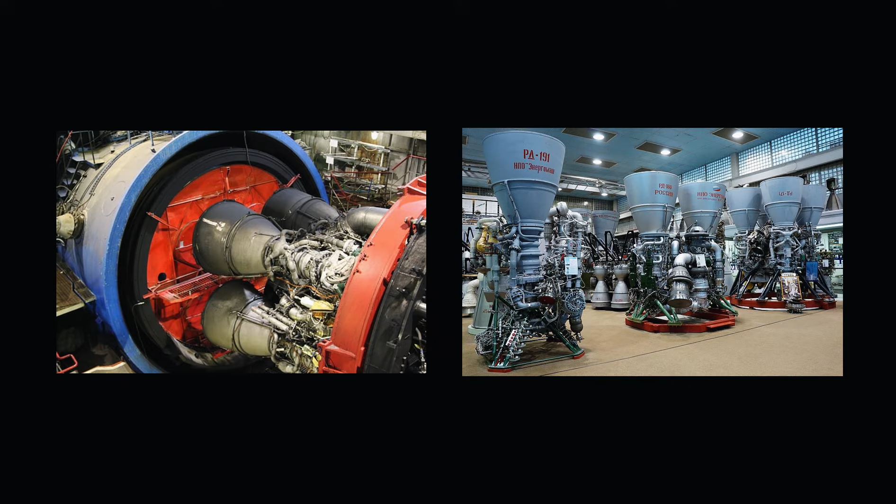The engines developed by this company ensure reliable injection into orbit of almost all the Russian space objects, starting from the first satellite Sputnik and the manned spacecraft to the Mir space station.

The story starts with the OKB, or specifically OKB number 456. OKB stands for Experimental Design Bureau.

During the Soviet era, OKBs were closed institutions working on the design and prototyping of advanced technologies, usually for military applications. From this OKB emerged the NPO Energomash, which launched a propellant-fueled chapter in Soviet and Russian rocketry.

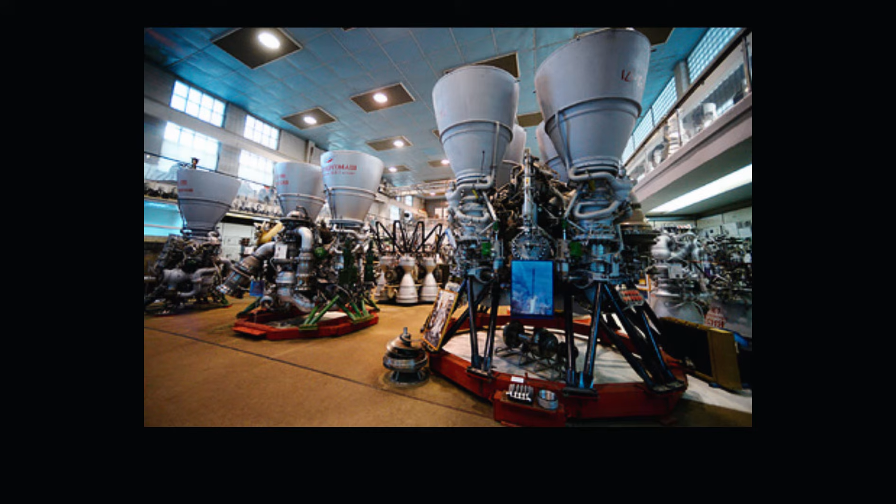Born from the rubble of World War II and propelled by the unyielding vision of Valentin Glushko, these institutions, being institutions of national importance, shaped the Cold War significantly.

OKB 456 marked the Soviet Union's audacious bid to conquer the heavens through the study and research of rocketry.

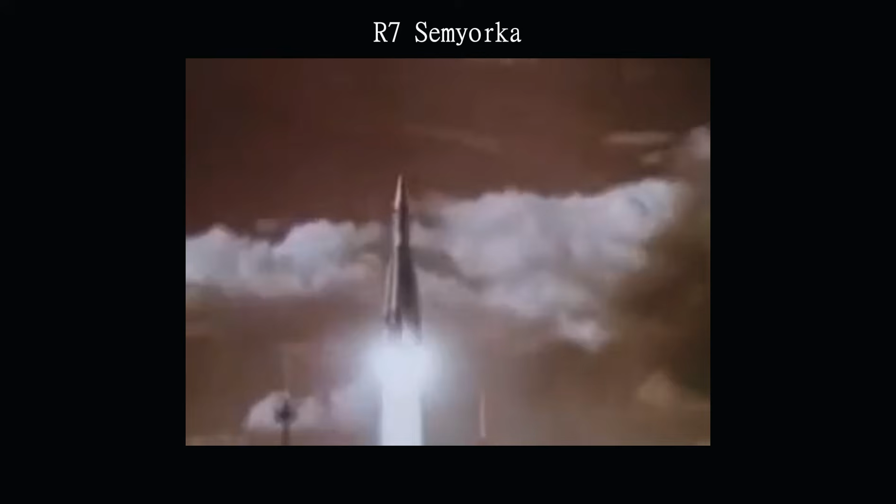As the Third Reich fell, the United States and the Soviet Union tried gathering as much information and resources as possible from the German aerospace ventures, especially the V-2 rocket.

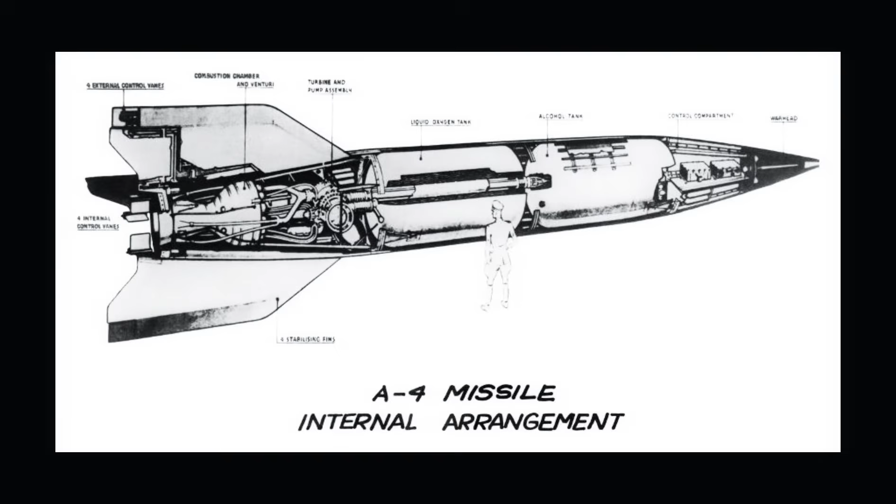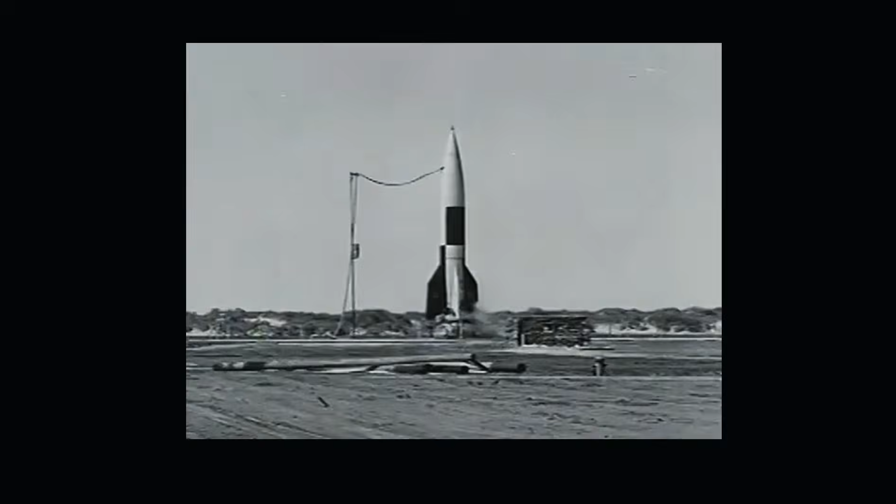Following this, Valentin Glushko assumed command in Khimki, a town in the outskirts of the Russian capital city of Moscow, where he was tasked with dissecting the V-2 rocket and studying the engineering and design that went into making this rocket one of the worst nightmares for the Allied forces.

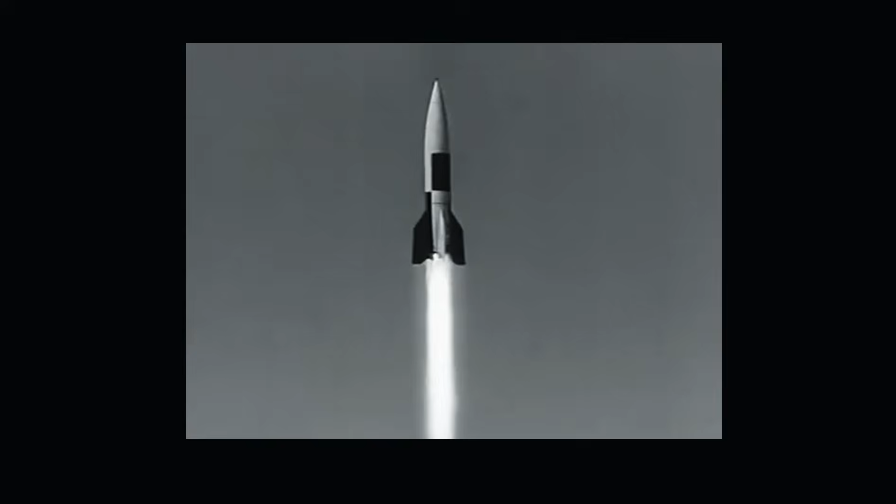By the year's end, the Bureau had transplanted its operations into an aviation foundry, erecting skeletal test rigs amid the chill of Moscow's outskirts. The RD-100 series emerged in 1947.

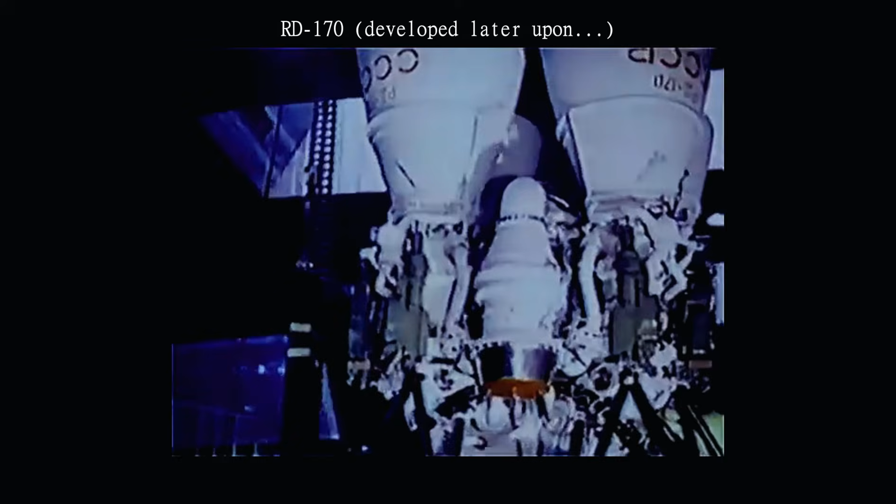These are engines running on kerosene and liquid oxygen, yielding thrusts up to 265 to 500 kilonewtons and specific impulses hovering at 200 to 251 seconds.

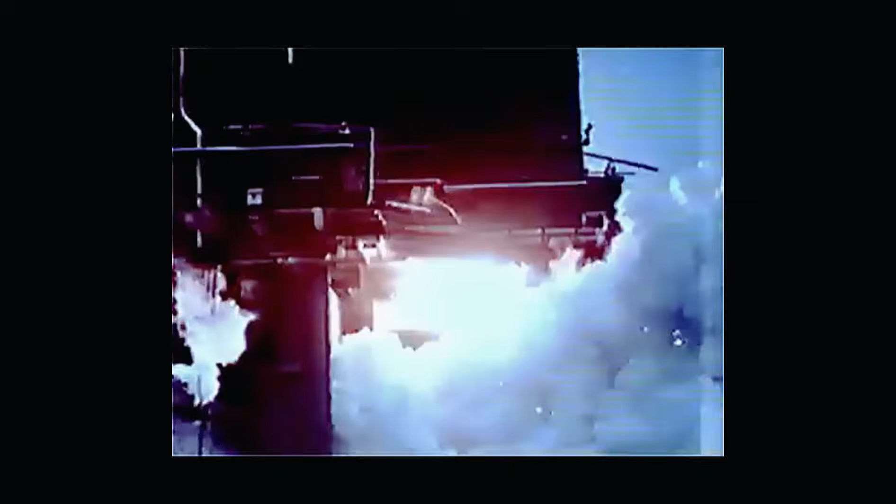This was the R-7 Semyorka, an engineering marvel that was born as an intercontinental ballistic missile, but ended up as one of the most reliable space launch vehicles in the world.

On October 4, 1957, the world and especially the United States was amazed to discover that the R-7 rocket, powered with the RD-107 and RD-108 clusters, had hurled Sputnik 1 into space, a beeping aluminum volleyball-shaped satellite.

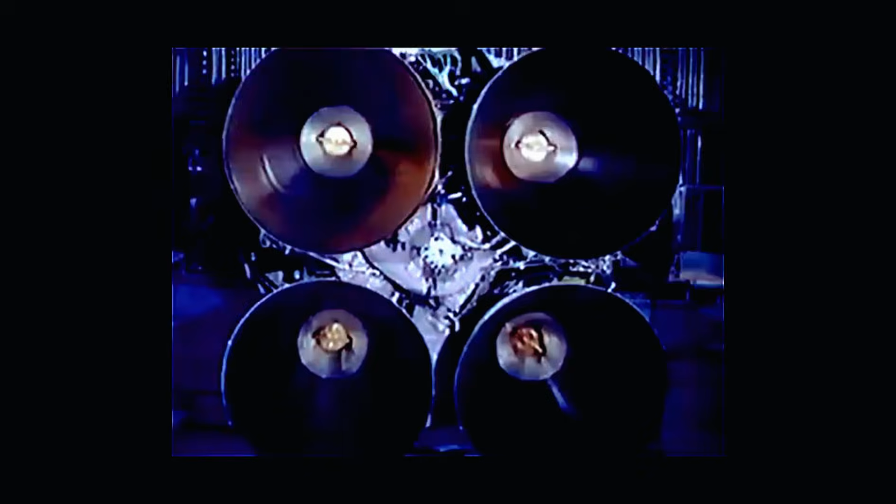This became the first ever satellite sent by humans to low Earth orbit. This was followed by over 1,800 such launches, proving how reliable Energomash's engines and the overall space launch vehicle were.

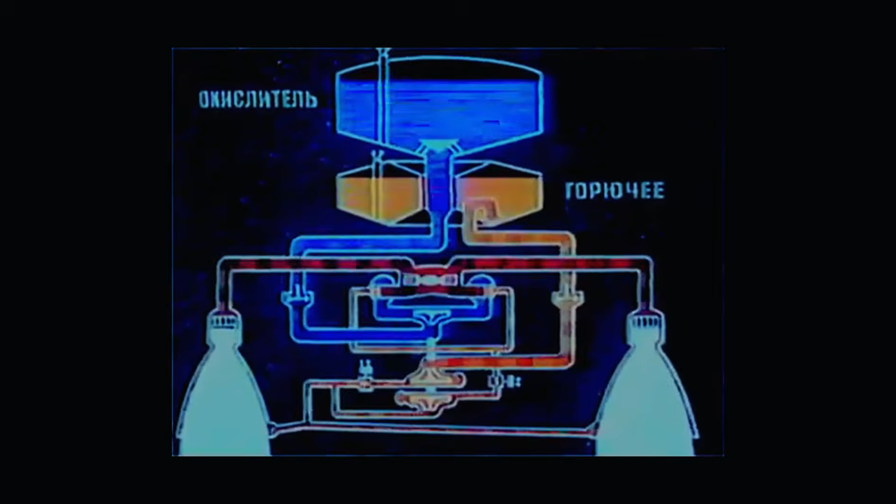Some of the major milestones include the launch of the first dog, the first man, and the first woman into space. These engines were also used in the lunar programs, though some of the rockets eventually exploded, and hence the mission was not taken ahead.

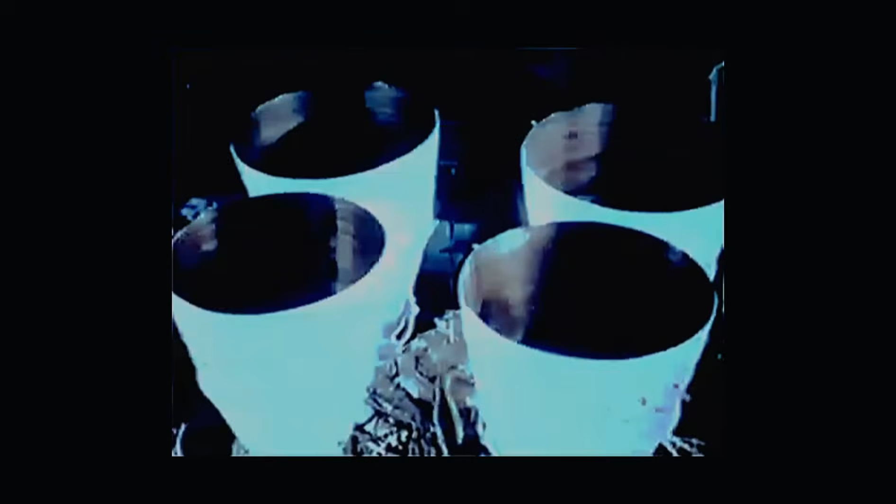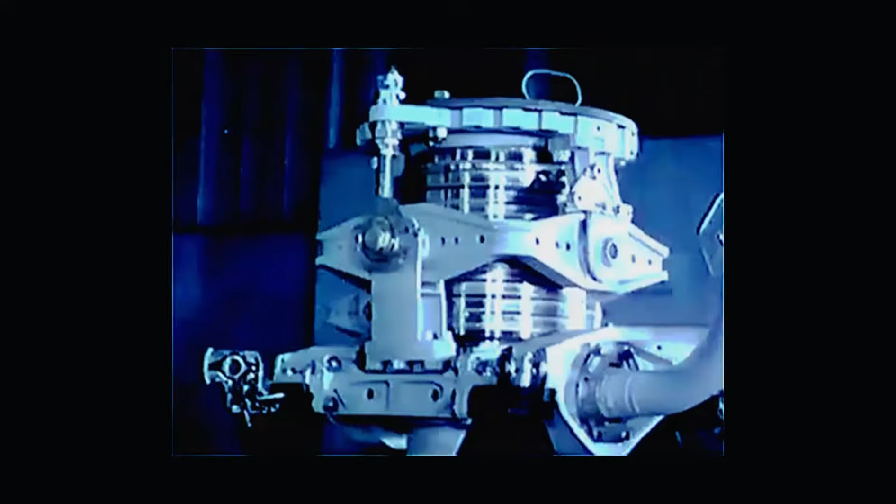Now in the 2020s, NPO Energomash endures as Roscosmos' unyielding force. The RD-191 engine series are being manufactured to power Angara A5, which can be used as a potential lunar mission launch vehicle.

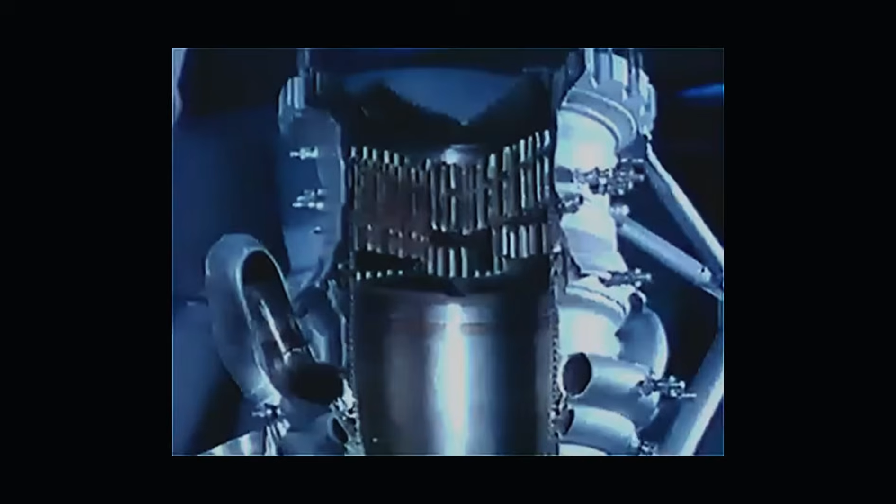In fact, there is also discussion of using methane as a rocket fuel, although not much detail has been shared with the public yet, apart from a few contract details.

As geopolitics keep evolving, it would be interesting to see how the Russian space industry adapts and innovates to hold on to its position as a significant space leader.